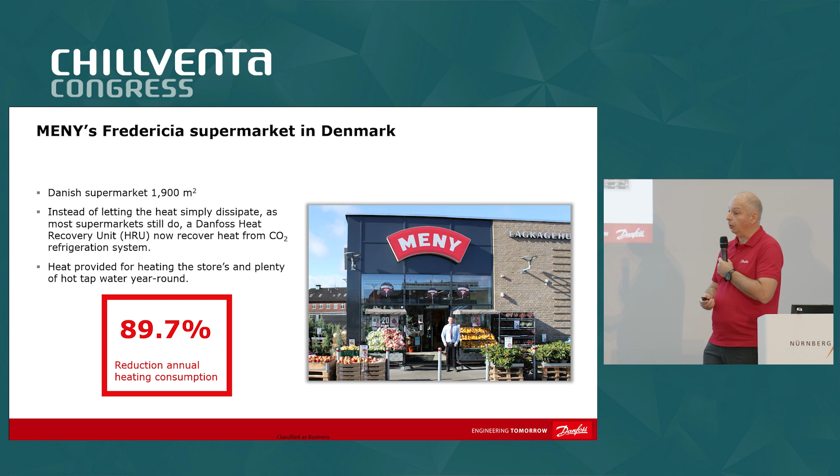And we got to these fantastic results that we almost didn't have a need for this additional heat from the district heating system. But how did we do it? So first of all, some basics about heat recovery. When we don't have a heat recovery request in the system, of course, we are optimizing operation of the refrigeration system, not consuming so much energy for the compressors, etc. But if there is a need for heating, of course, we have to do something.

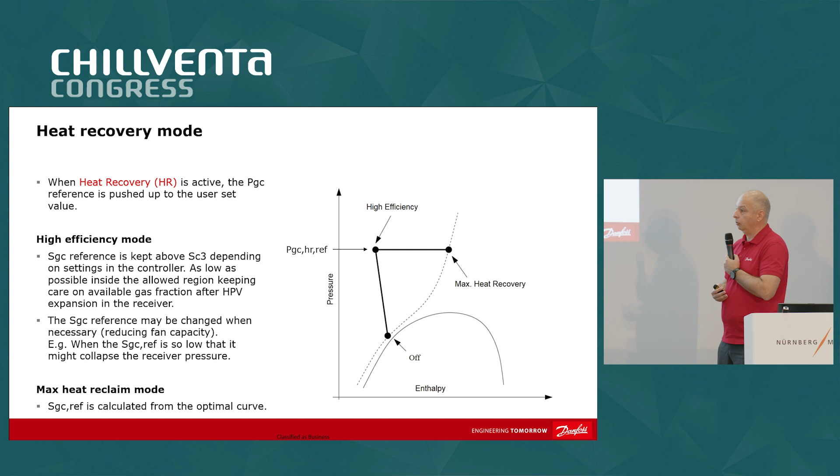First step is to increase pressure. And by increasing pressure, we are, of course, enabling more and more heat to be recovered. As a second phase, we are able to increase the reference temperature out of the gas cooler to get at the end of this maximum requested stage to what we call the optimum COP line. And in that way, we can completely recover heat from the refrigeration system.

How it works in real life. So here is a heat recovery, let's say, plate heat exchanger. At the first stage, when there is no heat recovery request, there is only very small potential you can recover, because the temperature on the discharge of compressors is very low. And if we assume that the return temperature from the system is on the level of 27 to 28 degrees Celsius, this isotherm of 32 degrees Celsius is simply limiting how much we can recover. So as you can see here, it's on the level of 10% of the available enthalpy difference. The rest of the enthalpy difference we have to release to the ambient, of course, using the gas cooler.

When we need to do heat recovery, as I said, first step is to increase the pressure in the system, gradually, of course. And as you can see here, the potential enthalpy difference you can recover is becoming more and more. And our final goal is to get to the level which is above the critical point. Typically, it's around 80 bars. Keeping at first the constant temperature we started with, in this case 9 degrees Celsius, but it could be 5 degrees, it could be 15 degrees, depending on the ambient conditions. But this is the goal, to recover this heat. You see this red line. But still, for the rest of the heat we have to release, we are using fans on the gas cooler.

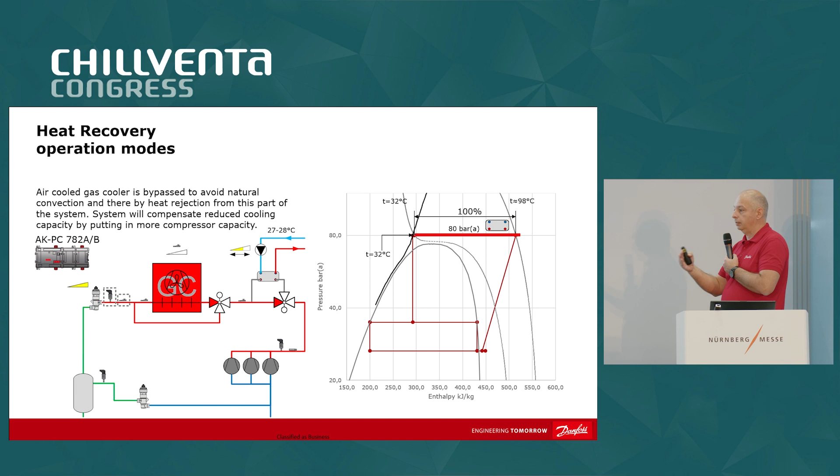What to do next? So this is the point when the refrigeration system still has an acceptable efficiency. But again, if you need to produce more heat, of course, you need to engage your compressors more and more. And how to do it? We are starting to decrease the speed on the fan. And by doing this, the reference temperature out of the gas cooler is becoming higher and higher. But again, we have to stop at some point, and the point is this optimum COP line. When we get to this line, we are at the final stage of what we can do with these pressures and temperatures. And this is the point where we can completely recover heat in the heating system.

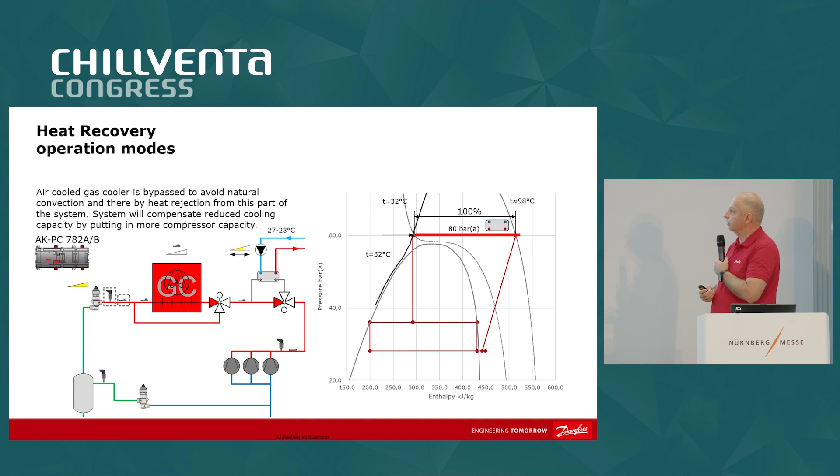Of course, now our refrigeration system is not super efficient, because actually we are working like in the summertime, because the reference is quite high, 32 degrees Celsius, and pressure is 80 bars. We have quite a lot of gas fraction in the receiver which we have to bypass. So, of course, the goal is to produce more heat. This is the reason why we are doing all this process. And the point is, part of the system is working like a heat pump.

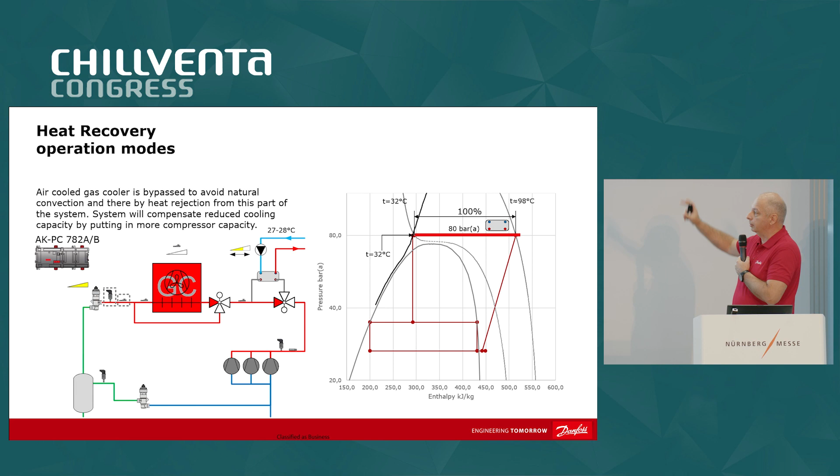And if there is not enough heat stored in these tanks or heat produced from the CO2 systems, there is also possibility that you can connect to some external heat source. In our case, it was district heating, but it could be any other boiler system or gas station or whatever. There is also an option, but not used in this case, to sell the heat to the district heating. This has to be, of course, dealt with the district heating systems to enable this possibility.

And in some countries, they found it as a quite interesting feature because also the district heating has some period in the year where they have to do servicing, etc. So they consider this as a supply to their heating system to overcome this service situation. But in our case, we had this connection to the district heating system.

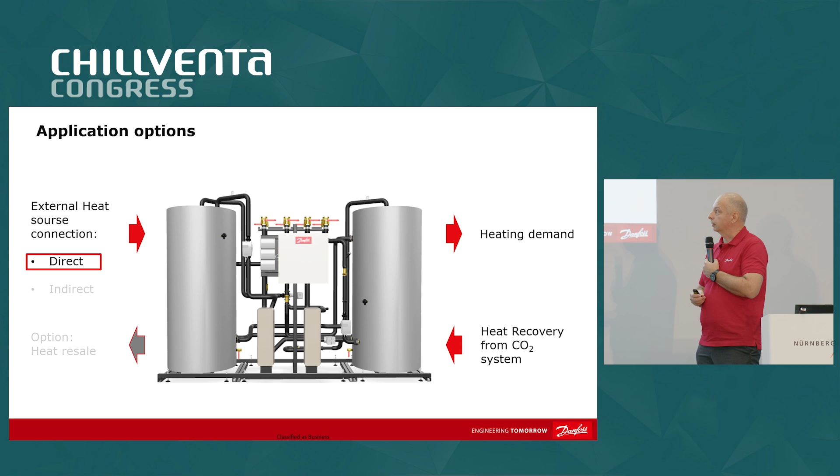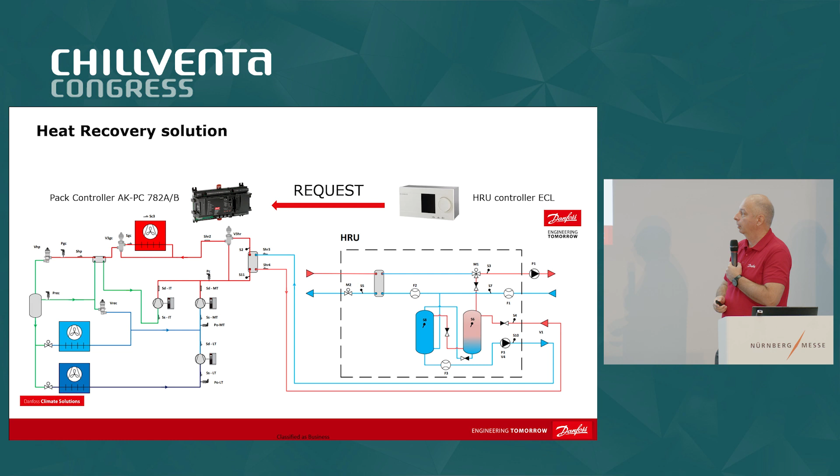So, as I said, we are following this logic, and by increasing request from the ECL controller to the pack controller, we are starting to do this process, of course, in a controlled way. First, we are increasing pressure. After pressure is increased to the level, in my example 80 bars, we are getting to the heat recovery pressure in the gas cooler. And then as the last stage, we are increasing the temperature reference for the temperature out of the gas cooler. And then we are reaching this point here in this triangle.

Very often it's a problem in the winter time when you need a lot of heating. Your refrigeration system is mostly on the minimum, and then there is not enough, let's say, heat sink to produce more heat. And in many cases, especially in this Central European climate, it's necessary to add an additional evaporator, which will be engaged as a very last stage in this heat recovery process to enable this heat pump operation so that your compressors will work more and more, and of course, produce more heating energy. So, this is what is happening at the very last stage.

First, we are bypassing the gas cooler completely so that there is no more flow through the gas cooler, because even if you stop your fans, simply by going through these cold coils, you will overcool your CO2. It will become liquid. And then as a very last stage, we are able to engage this additional false load evaporator.

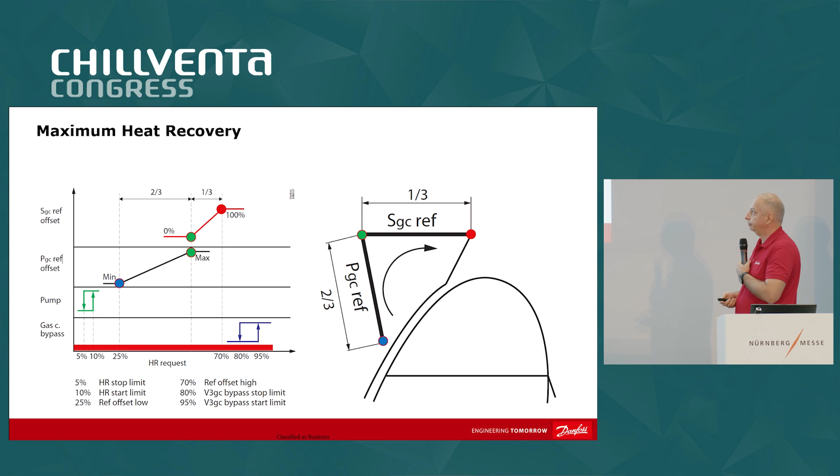The second or the third, let's say, important thing is what is happening on the hydronic side. It's the importance of return water temperature limitation. Imagine you are doing your heating system and you are not controlling your return temperature coming to, in this case, the heat recovery unit, to this plate heat exchanger. And then, for example, you have a return temperature of 40 degrees Celsius.

If it's 40 degrees Celsius, simply you have some thermodynamical limitations, so you cannot cool with 40 degrees temperature water. You cannot cool down to, let's say, for example, 32 degrees. It's impossible. So what is a strategy?

First, you have to limit on your consumers. There are balancing valves in the system, automatic balancing valves. You can define what is the designed flow for this particular point. There are valves, we can do it. And then on the top, you can also put a very smart drive to limit this temperature. So you have some temperature measurements that can control what you will allow to have as a return temperature.

In our case, I use this example with 27 degrees Celsius, and let's say typically the ideal system is with this 27, 28 degrees Celsius return temperature. I try to show this in log pH diagram, that if we imagine on this plate heat exchanger 5 Kelvin temperature difference, which is a good example, you can make this complete heat recovery.

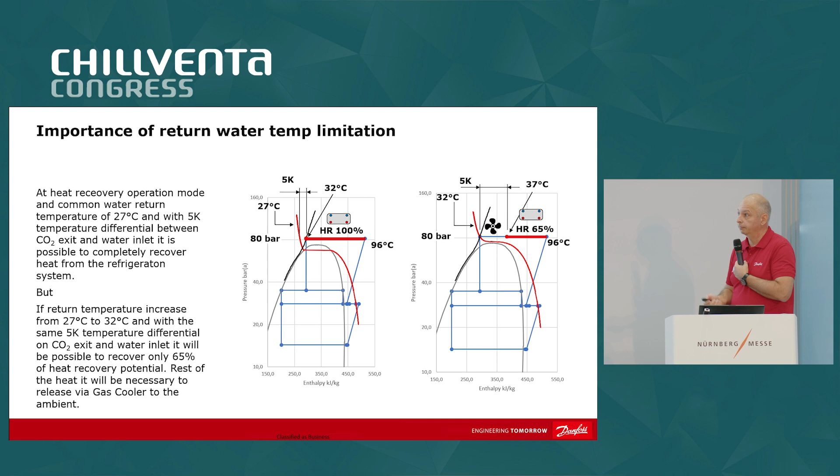In this case, you lose 35% availability to recover. Then what to do? The rest you have to again release to the ambient, and this is definitely not your goal. How to do it? There are valves, ABQM valves. It's automatic balancing valves. On these valves you can limit the flow, and it will work, of course, what is necessary to do.

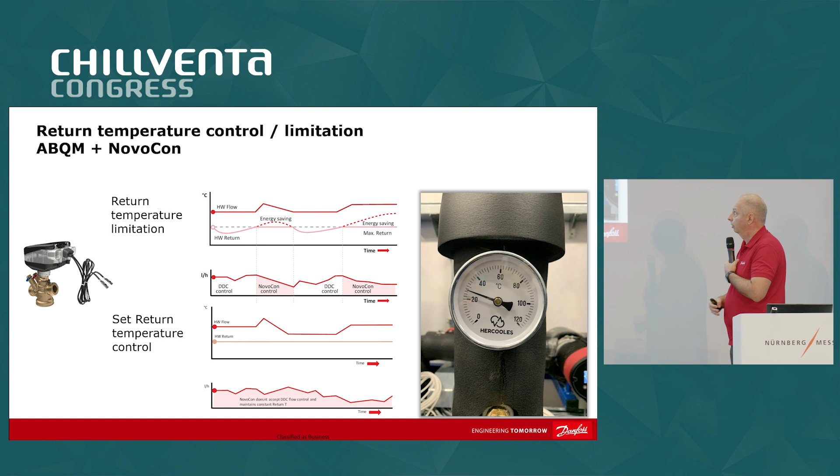But on top of this, the point is to put these smart drives together with sensors, and then if you program it in the right way, you will get this possibility to either control the temperature limitation, so it can be really controlled on, let's say, 27, 28 degrees, or you can just limit, and then everything below 27 you allow, but you are not allowing to go above this temperature. This is example of the thermometer from this plant to show that this goal was really achieved.

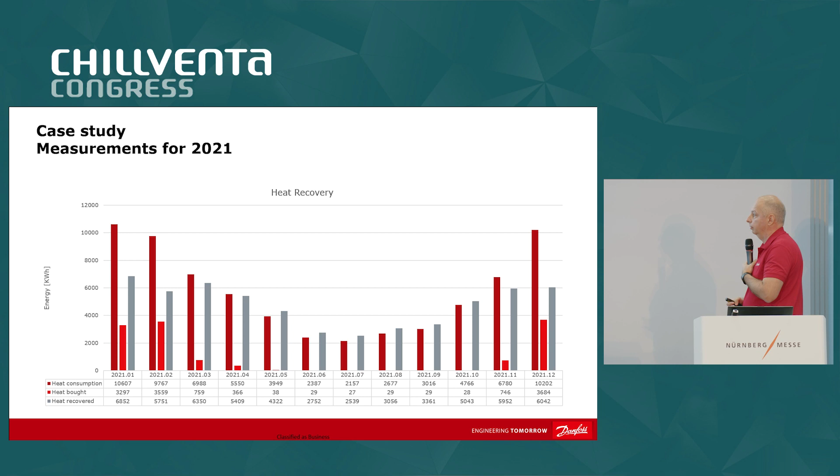Final results. As I said, we had a fantastic opportunity to have one whole year of measurements when the system was connected to the district heating. And then the year after, it was connected to our heat recovery unit. And if you can observe, during this month, of course, the heating requests changed a lot. With this gray bar, you see how much we can produce and how much we consume.

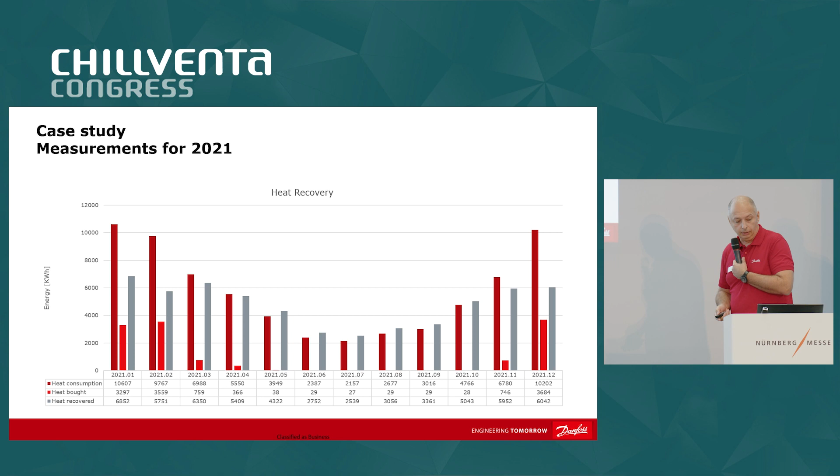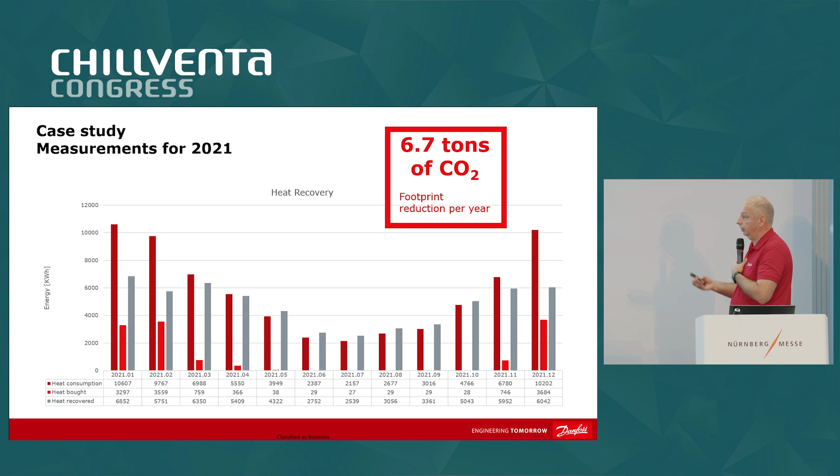And after all this year analysis, what is here presented, we can say that we saved quite substantial tons of CO₂, which was supposed to be used if you use a burning plant. And in this case, it was used, of course, for the district heating.

Conclusions. We did, first of all, analysis of the existing system. And actually, most of the savings we achieved was because we properly balanced the system and we applied this correct control of the return temperature, and a substantial amount of the savings was coming from that part.

The rest, of course, is from utilizing this heat recovery unit, and together all this gave us fantastic results, that this system was almost independent from the district heating supply. What can be done additionally? Of course, on this plant, this false load evaporator was not implemented.

So if you would like to be completely independent from any other heat source, there is also an option to add this element in the system, and then you will be completely independent from any other heat source, which is today quite an interesting option. Yeah, that's it.